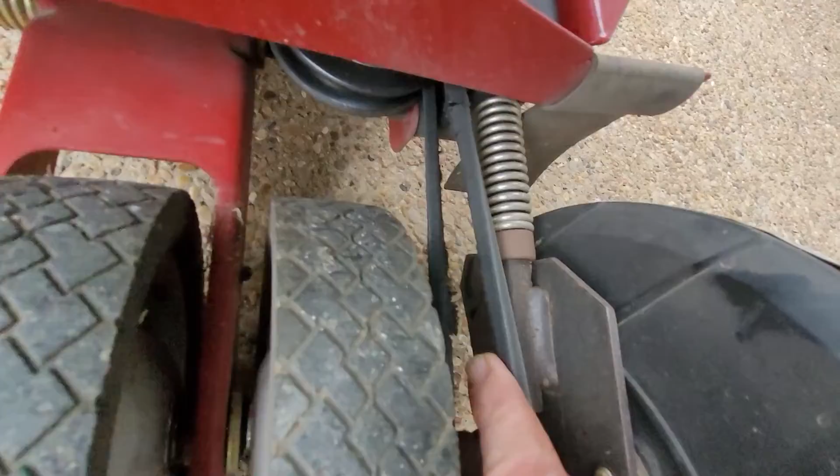It's a Craftsman lawn edger trencher, model 247772461. Today I'm going to help Larry change the belt. You can see it's all frayed. And we're going to change the blade also on the side.

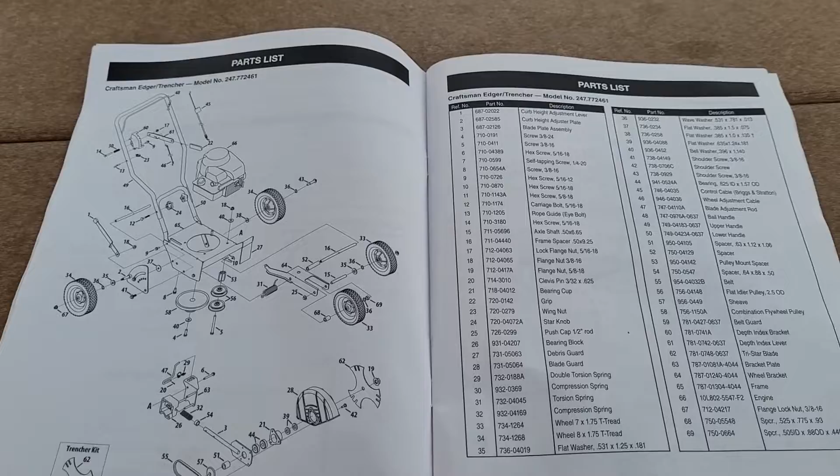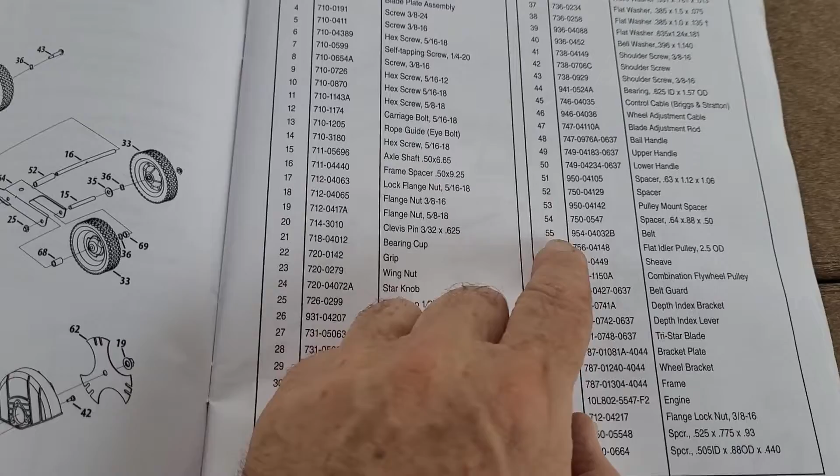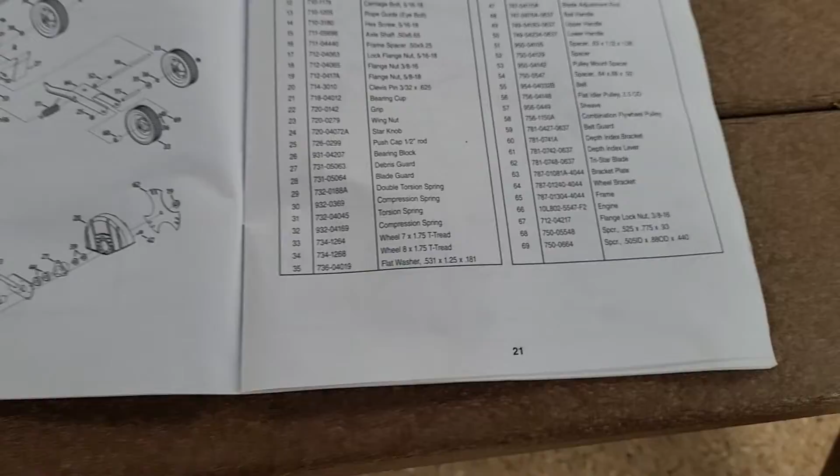We've ordered our parts. The belt is on the catalog of 55 and the blade is 62. And if we look over here, we can see the belt is part number 95404032B, and the blade is TriStar blade, part number 78107480637.

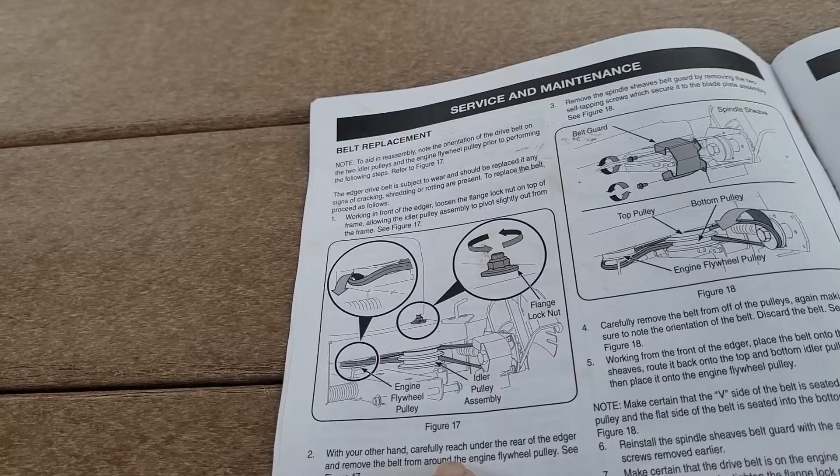So we're working from the front of the edger, so we're going to be working in this direction. There's a little bolt here, and you can see that under here. Right here. It says working from the loosen the flange lock on top of the frame. That's this, allowing this little pulley system to toggle this way.

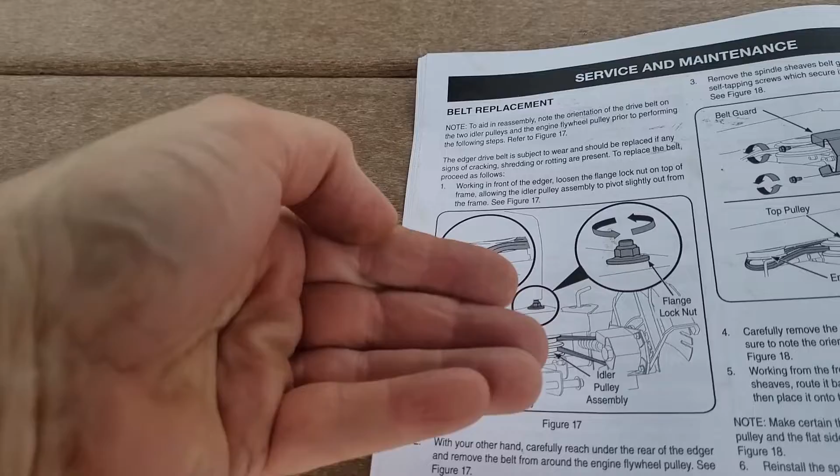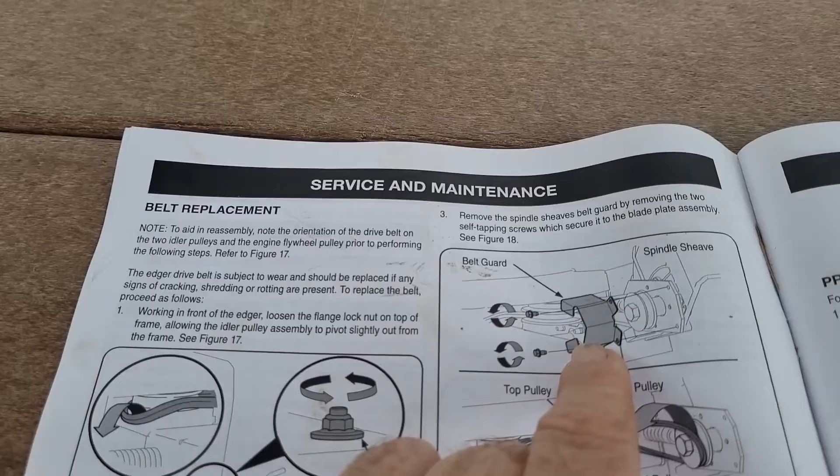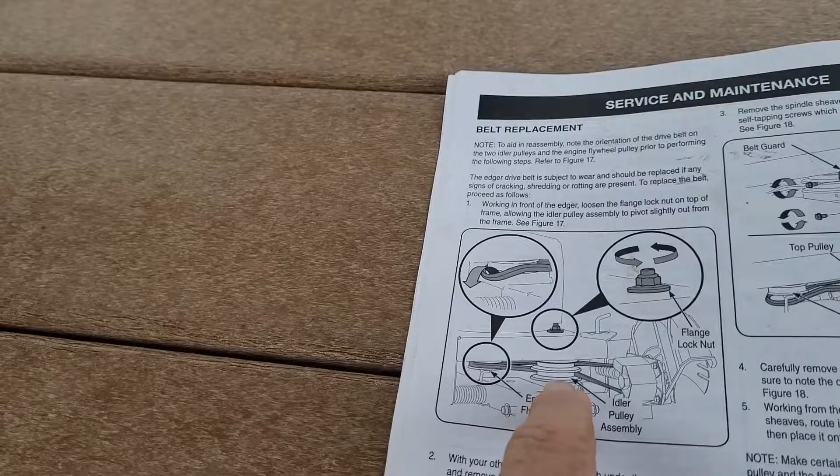And then reach under and remove the belt, and then put it back in. We will have to take off this belt guard up here also, that's in the front of a little pulley system. And there isn't one on here, and that's interesting, it's just wide open. So we'll try it that way first, just to loosen this, allowing it to pivot slightly out from the frame.

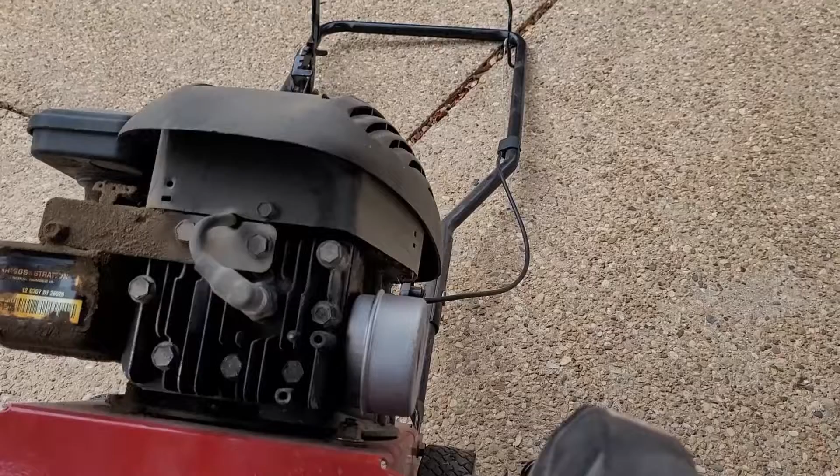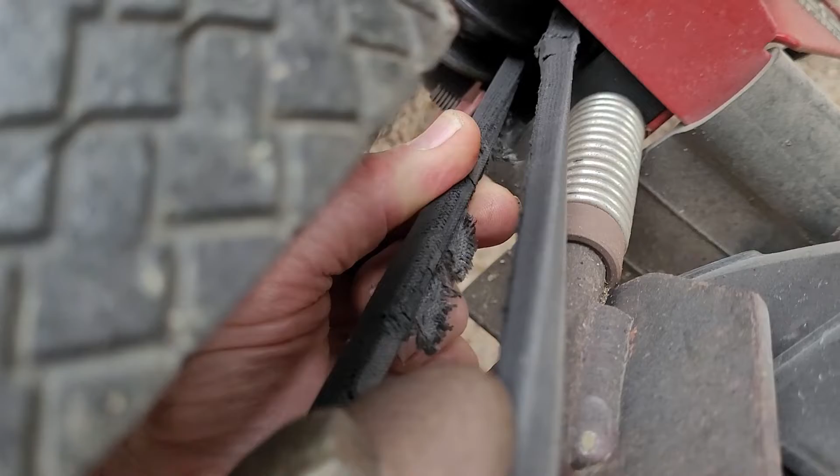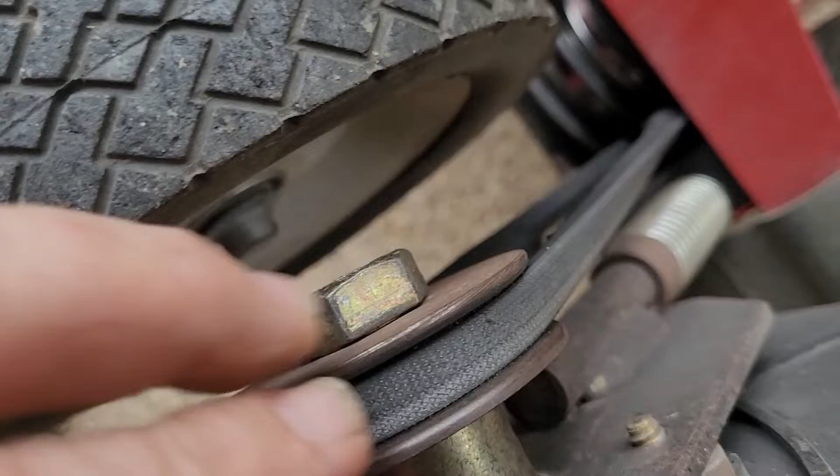So if we study this belt, it's flat here, which means the V is on the inside, and looks like they're both going to twist. You can see the damage. So this top one is going to twist to the right so that the V can be in this top pulley here, and the bottom one looks like it's doing the opposite. So where my finger is the flat part, and the flat part is going to be inside this pulley. So from the top side we're going to have the V here, and from the bottom side we're going to have the flat part here.

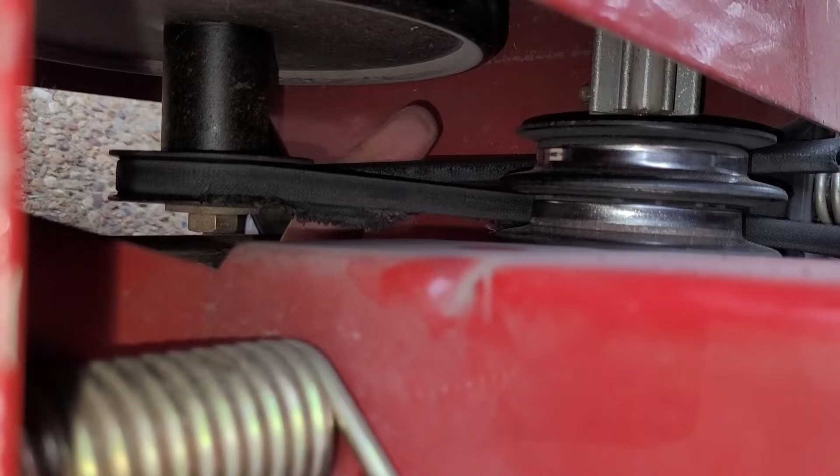Coming off the back of this top pulley, see my finger, that's the flat part, and it's going to continue going around, which means, as I said, the V points in on the top, flat part comes around the back here, and now the flat part is here and the V is pointed out. We just have to remember that.

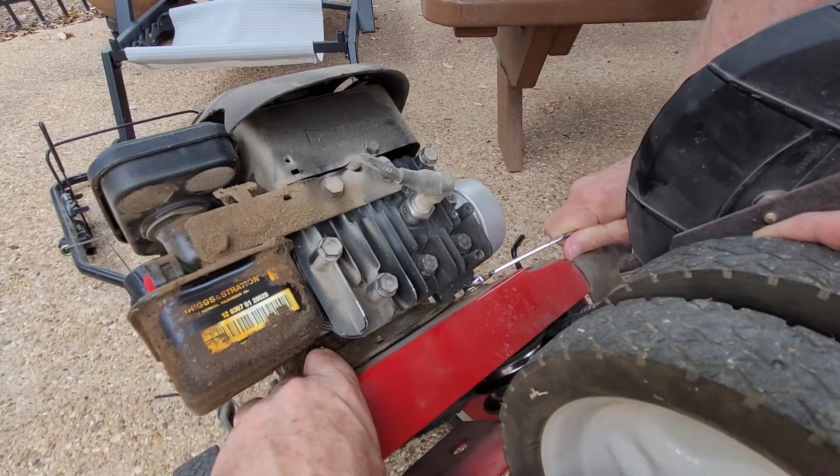Okay, we're going to loosen this nut right here that holds the pulley, but we're not going to take it all the way off. So we're trying to take it out just enough so that it tilts and gives a little bit of release of pressure to the belt.

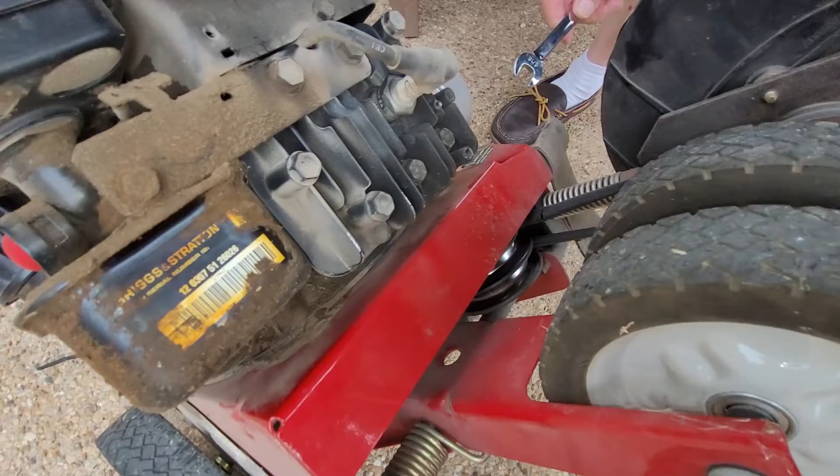You can keep going. Well, I think the nut and the screw is both turning. I have to catch it from below then. Yeah, we have a bolt head on the bottom I'm going to hold while we finish loosening the top. It started loosening and then it stopped. I'll get it from the bottom, you get it from the top. Ready? Yep. You just want to go to where the threads are open, closed. Yeah, that's good. That's where we want it.

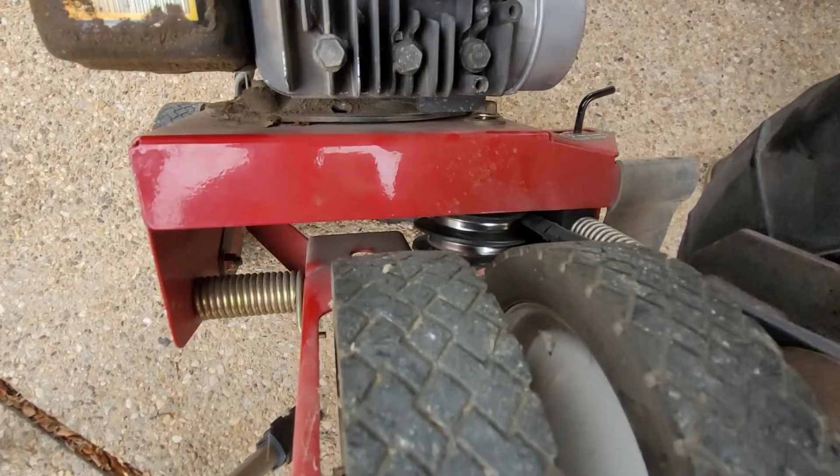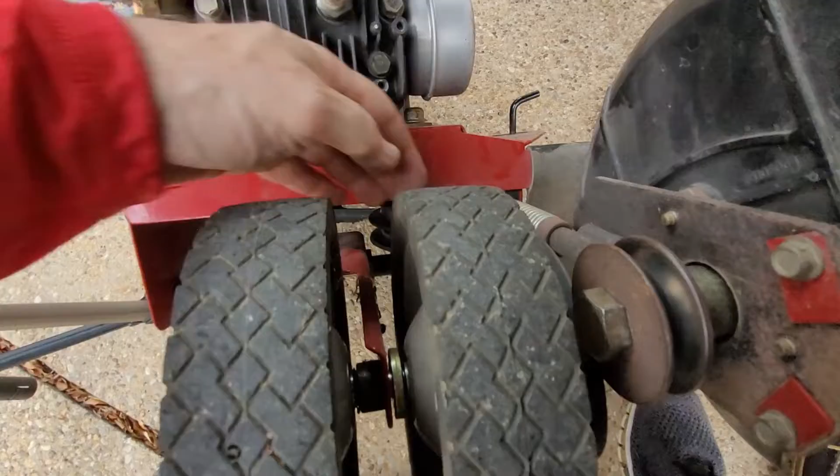Now we'll be able to take the belts off. So we're going to start from the front. Take this off. Do we need a screwdriver? Okay, we got that off the front. Now these should both push in. Yeah, they're both pushing in. And it comes right off. How old is that belt? I don't know, Peter.

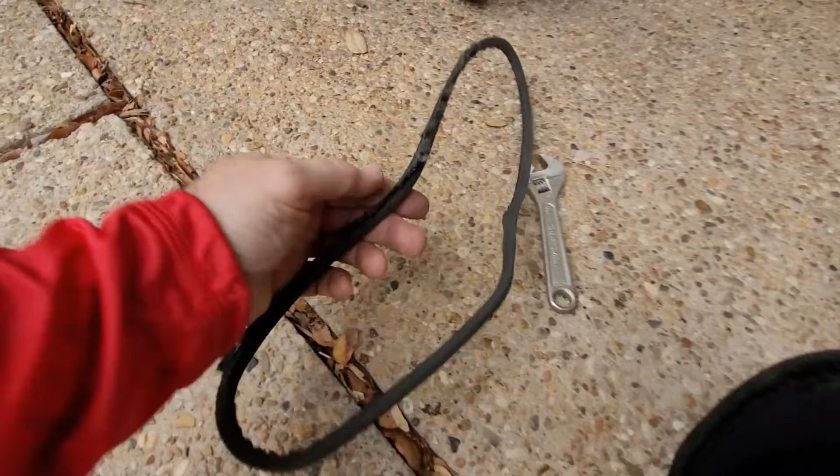Time to replace it. So we're going to start from the front, put it on, and then feed them both through on the side over here. Okay, that took a little bit of finagling. So we want it to stay on front here. When you push it through the side here, have your spindle cocked out and forward. You need to give it some room in the back here to be able to pull the belt through like that.

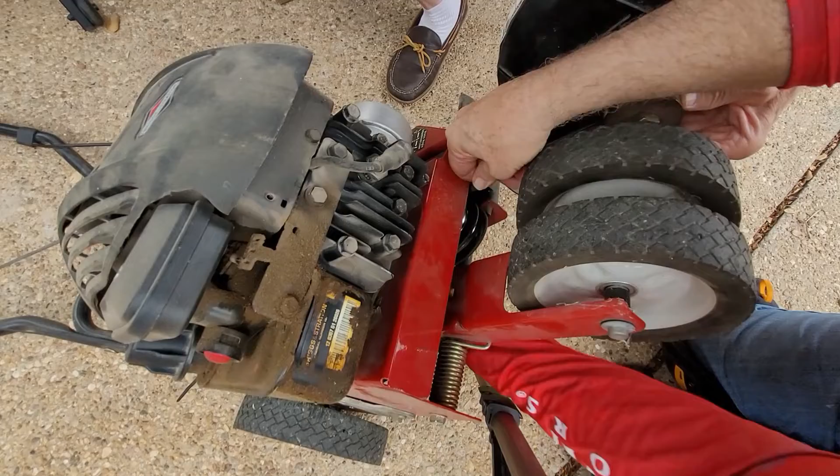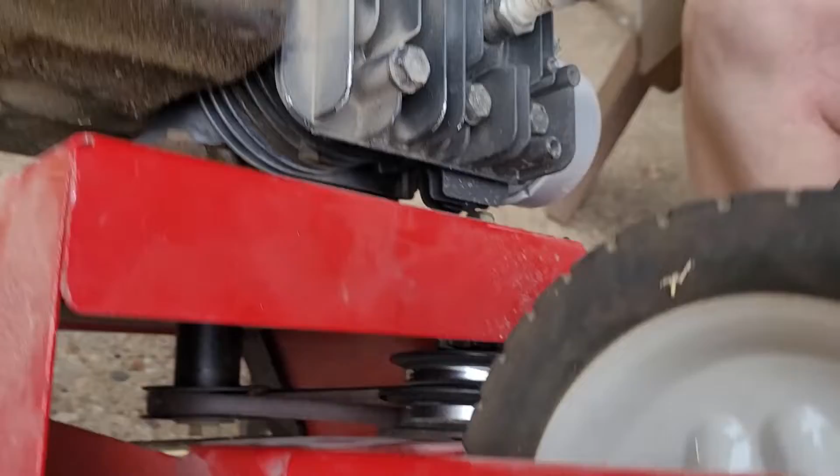Before, we showed you there's a flat part of the belt and the narrow part. The narrow part's going to be up here facing in, and on the bottom pulley down here facing in. So I'm grabbing it underneath, feeding it to the outside of this pulley. We took it off the front here, and we make sure we got it around these two pulleys in the bottom. And now we'll mess around with forcing it on the front pulley here.

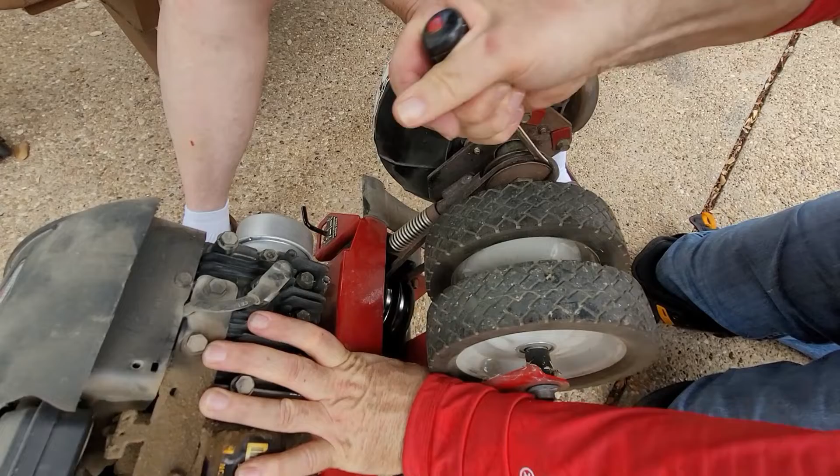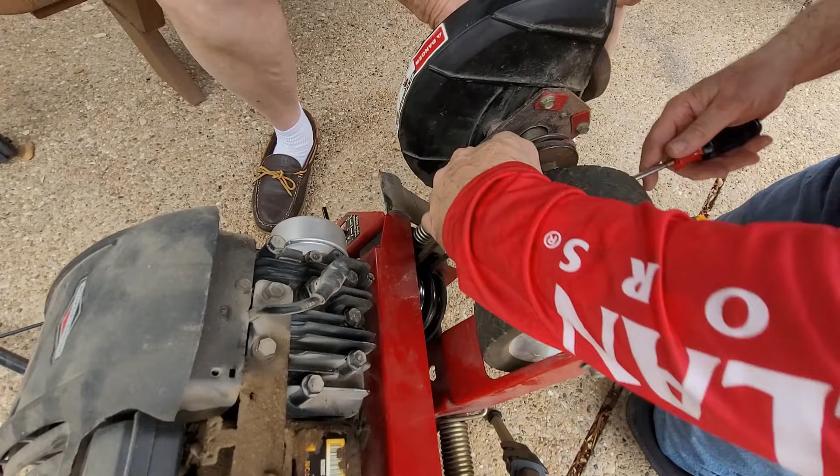Hold on, make sure we can pull this. This pulling. Okay, we want to be able to pull it. Should I turn the pulley the other way? Almost there. Use that nut for leverage. We need a 1/2 inch. It's bent a little bit. Here we go, right there. All right, let's see.

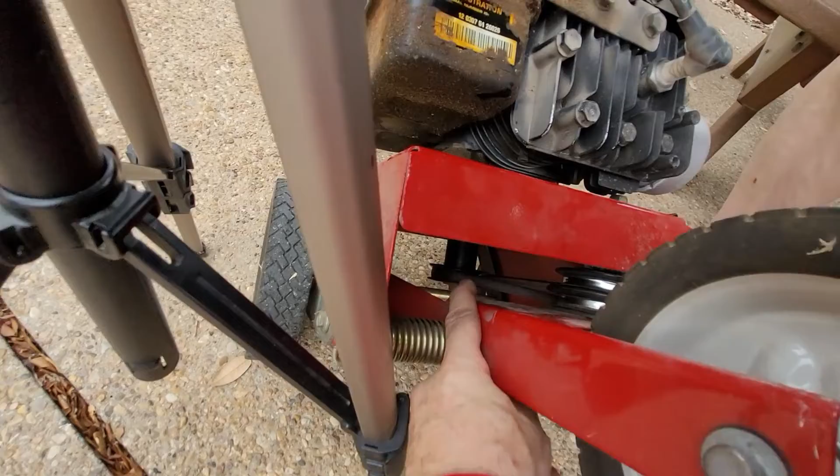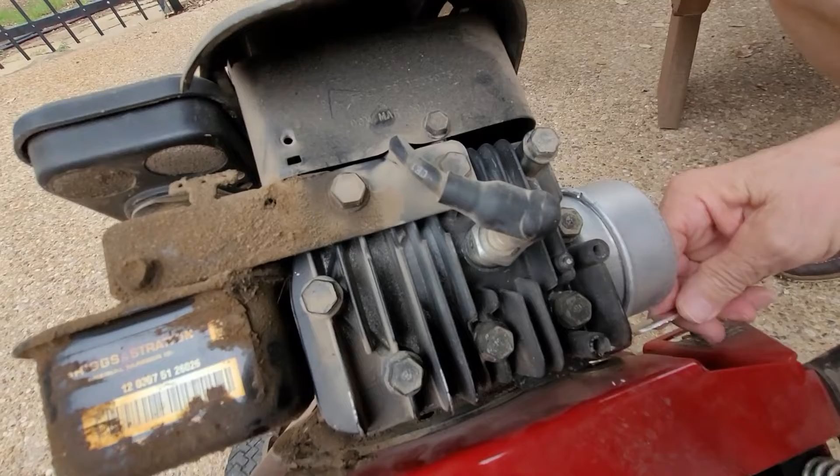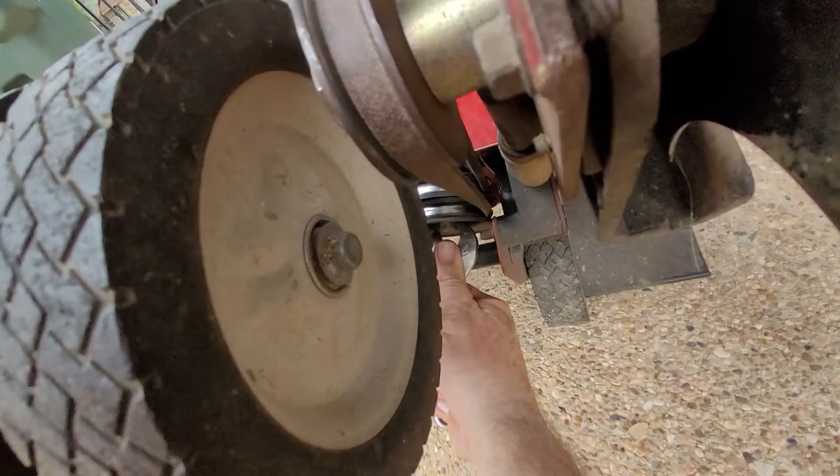So we got the wide end out, the wide end on the outside here, the wide end on the little pulley in the bottom, and then the pointy end is going to go here. Once we start it up, it should align itself. Now we're going to tighten this back up. Hold on just a second. Got it on the bottom. Hold on there.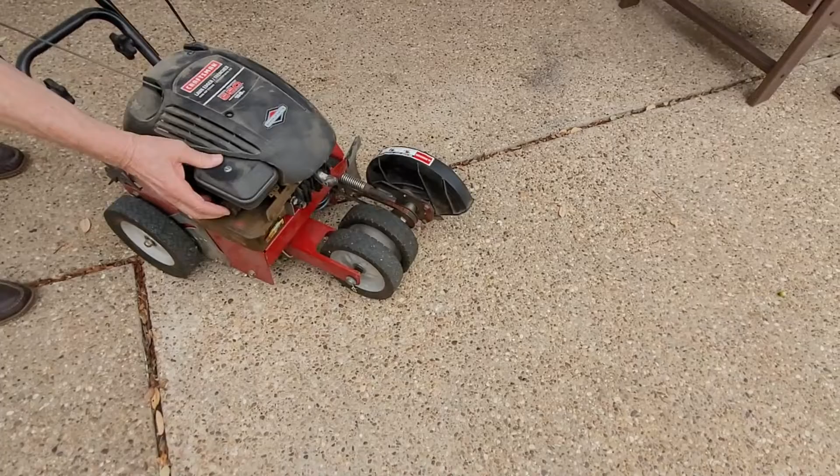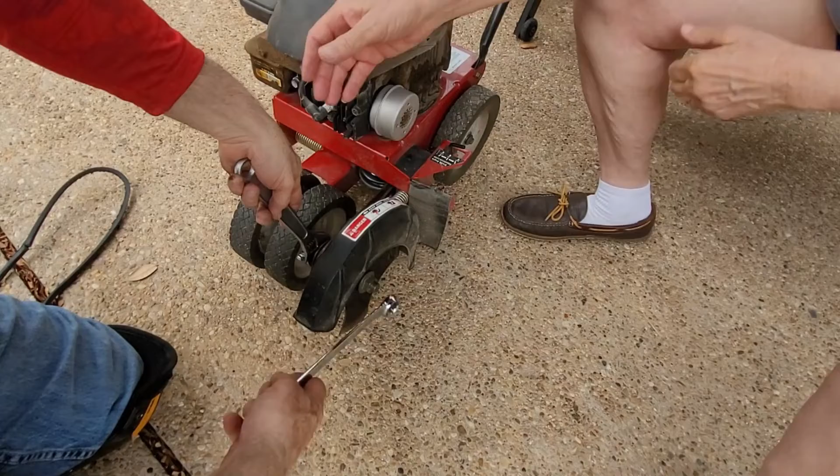Okay, we're going to do a quick test before we change the blade. Make sure, see if we can go in slow mode to give that. Looks good. All right, hold it in the back. Let's take this off. Oh, that came off easily.

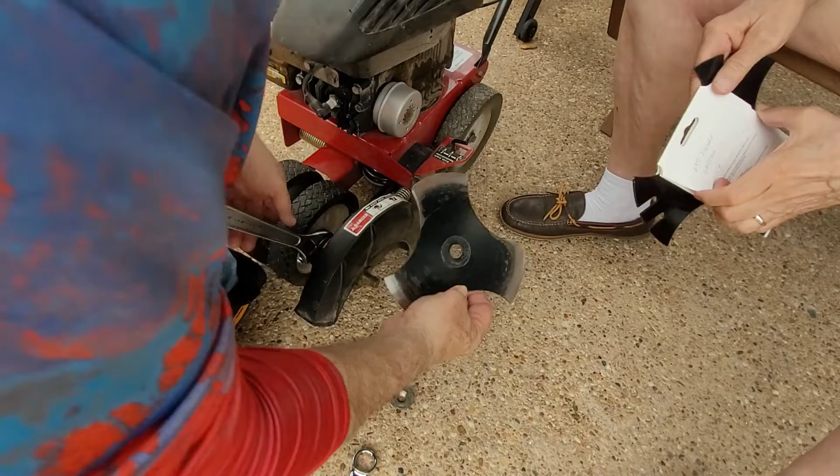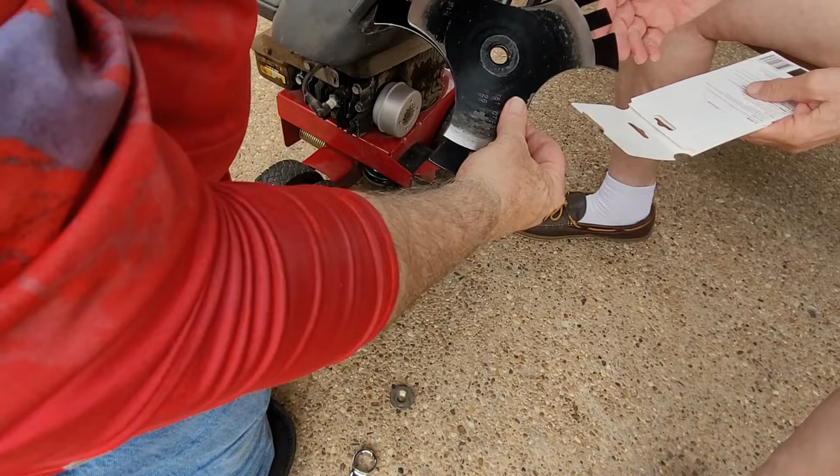The way this is coming out. Okay, you got numbers pointing out. No, it says outer. Here's, yeah, we'll put the numbers out. Oh, look at the difference in that. Wow, yeah, I could tell it was not. It's not etching anymore. Well, it was, but I had to really get it down deep, you know.

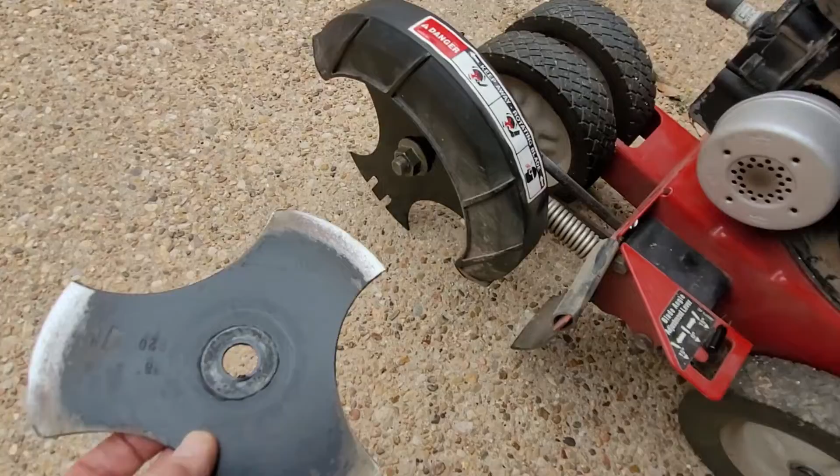Yeah, so hopefully that's gonna do a lot more cutting. Looking good. Mr. Larry's happy.